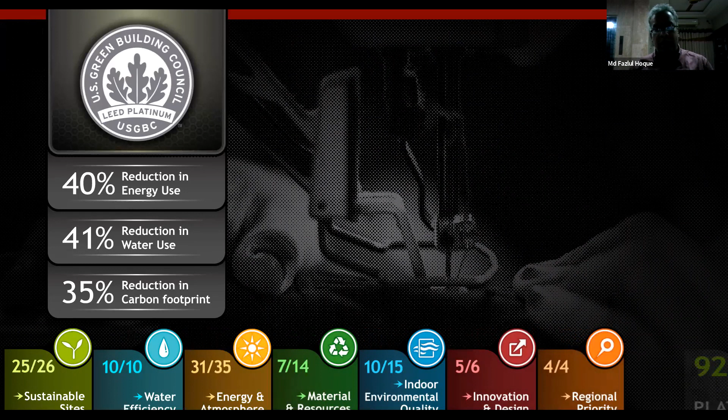Next slide, please. I will just share with you some features. This is the summary of the whole story: we scored 92, and there is the breakup of the numbers. Those who are very familiar with LEED can easily understand. But in summary, we are 40% efficient in energy use, we have 41% efficiency in water use, and 35% efficiency in terms of carbon emissions. Those are the three major pillars that we always focus on. But there are other facilities I will share in the next slides.

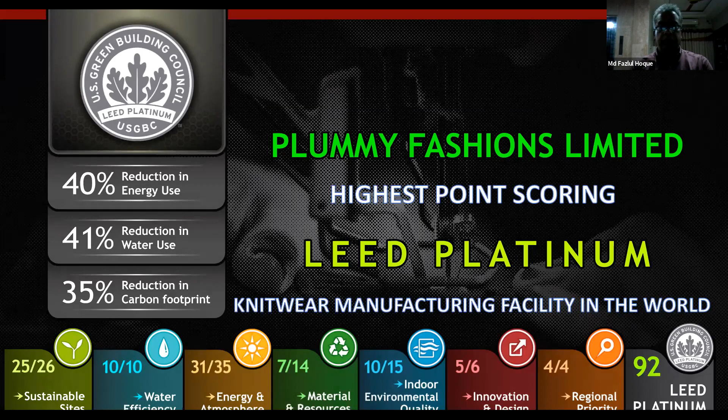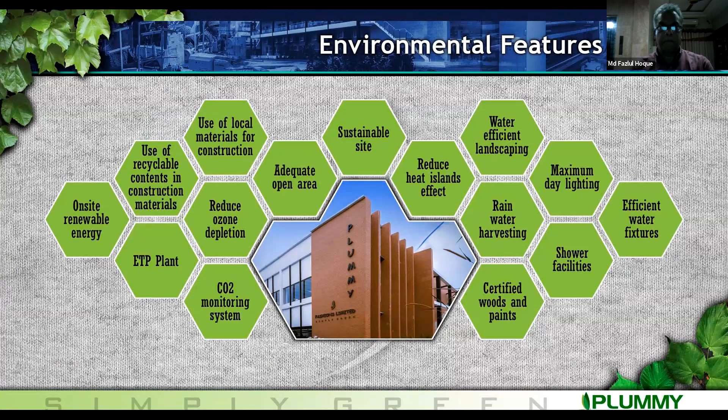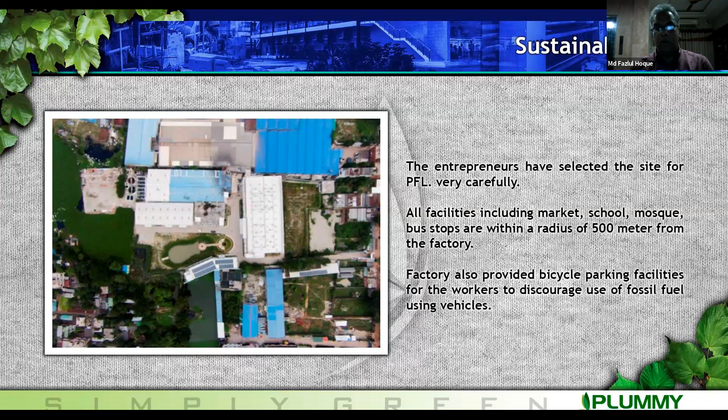This is a drone picture of Plummy Fashions, showing how strategically we are located as per the LEED requirement for what they call a sustainable location. Sustainable location means facilities like workers' housing, shopping, praying, and children's school should be within 500 meters, so that we can save a lot of energy in the transportation of workers. We are very strategically located, so we could achieve all these requirements from LEED.

As per the LEED Platinum requirement, not only do we have to score 80 points out of 110, but there are a few other requirements, and one of these is 50% open area. This is part of the whole scenario in our factory; you can see how beautiful it looks. It is my factory, so I always feel very happy to see it, but whoever visited, like Matthias, at least says wow. As I said in a small gathering yesterday, it looks like a resort, and today it's even better with more greenery. We have almost 65% open area, where 50% is required. These are a couple of pictures, but there are other open areas as well.

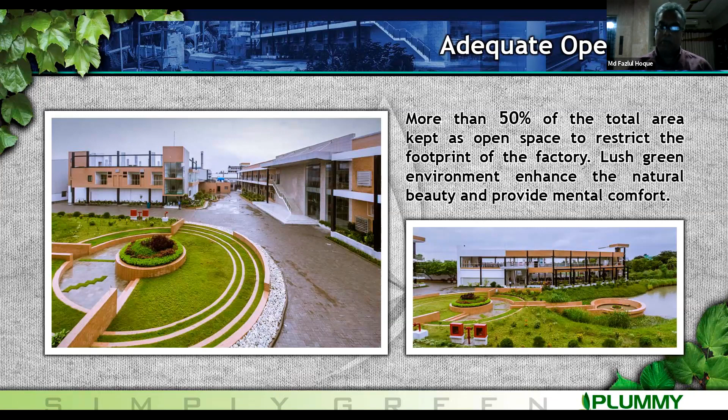As per the LEED requirement, we should have a water body inside to maintain natural tranquility, so we made this water body. It also helps us save rainwater, but it is not the only reservoir. There are 6 other underground reservoirs in different locations to preserve rainwater, which we use for toilet flushing. This reservoir is for natural tranquility and beauty, and also a huge source of water for firefighting. We have a dedicated firefighting reservoir, but additionally we calculated 6 million liters of water available in this water body. It is a multi-dimensional benefit.

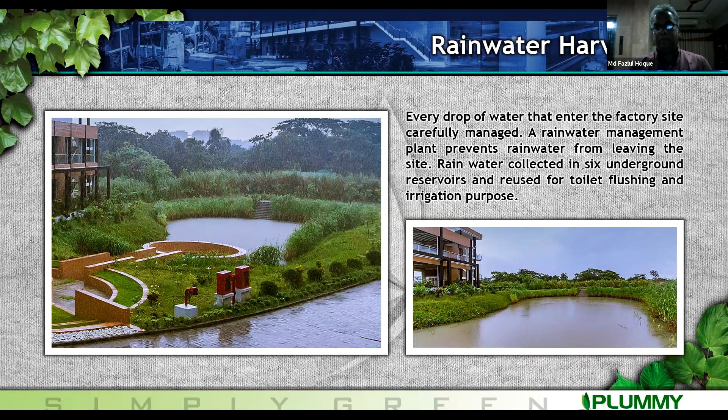And this is the air cooling system. We ensured that it is very comfortable.

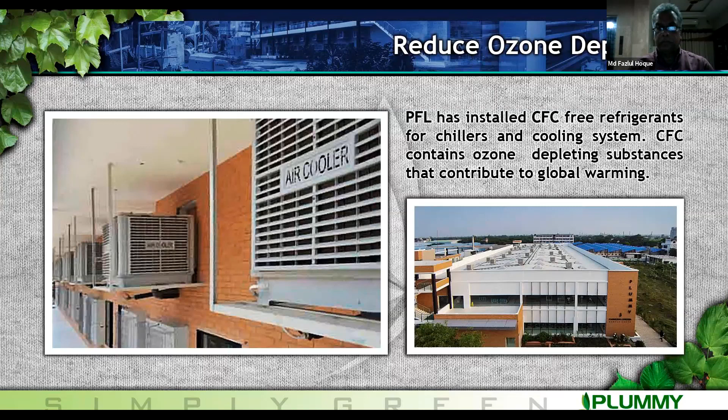Fazlul, are you still there? I can't hear him anymore. Maybe with this emergency lighting and the electricity struggling there in Bangladesh, it seems like we have lost him. Are you still there, Fazlul? Yeah, I'm here. Okay, good. Yeah. Cannot?

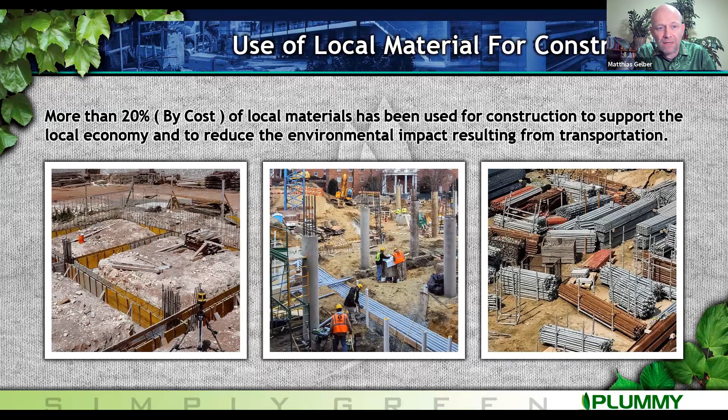I think his internet connection is a little bit unstable, but this is really the example showing the use of local materials as well. Partially, they used recycled materials. They tried to include local suppliers to increase the positive local impact on the local community. So this is the material sourcing part.

Then they installed as well a CO2 monitoring system. This is very important from a point of view of air quality, workers' health and safety. Do you have enough fresh air coming in? And particularly now in a time where we have COVID risk, this is even more critical.

Your level of CO2 in the occupied areas is actually an indication of whether you have got fresh air inside. If it's 800 parts per million going up to 1,000, then there is a lack of fresh air coming in. You can see here on the screen 518 parts per million, very high level of fresh air in there, because it's very close to 420, which would be about the ambient indication.

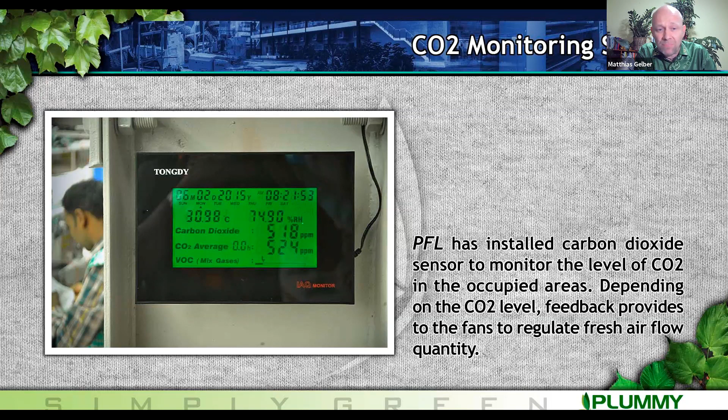This was actually fascinating when I was there. I was on the top floor where the workers were working without artificial light. You know, even in a garment factory where it comes down to the detail of doing a good, diligent job, the natural light that was coming through these skylights on the top floor was sufficient for the operational activities inside of the factory.

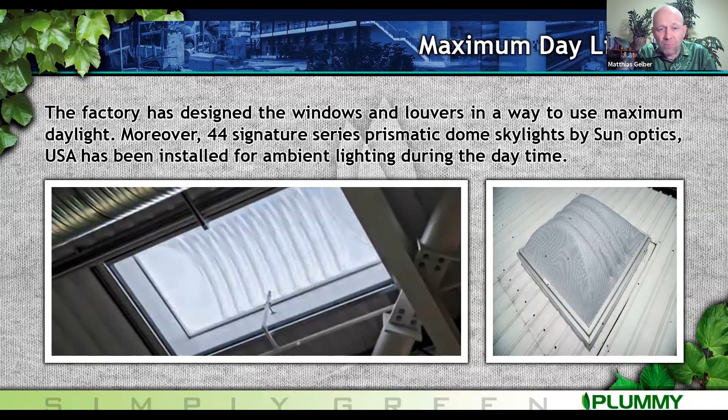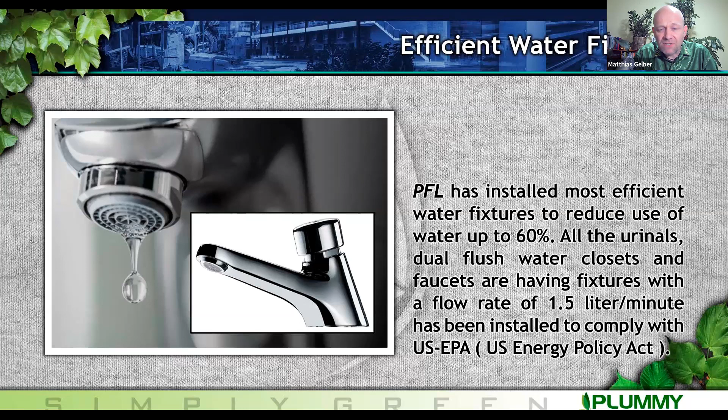And here we have the water fixtures, very efficient, 60% more efficient, urinals dual flush, big, small flush, and water fixtures having as well a low flow rate. You know, sometimes when you are in buildings, you put the water on and you can feel with the pressure of the water, there's a gigantic amount of water flowing through. But these are the ones that actually have a low flow rate to have water efficiency.

And certified woods were as well brought in, FSC certified, to make sure there is no cutting down of virgin forests, but sustainably managed forests that have been used. I think we will see a renaissance of wood as a building material because it absorbs carbon. So it is really a carbon sink. As long as it comes from sustainable sources or reused sources, it's actually very good because it locks the carbon in the long term. So this is as well very important for future construction. If we can have natural materials, natural biomass, I think that will be very good.

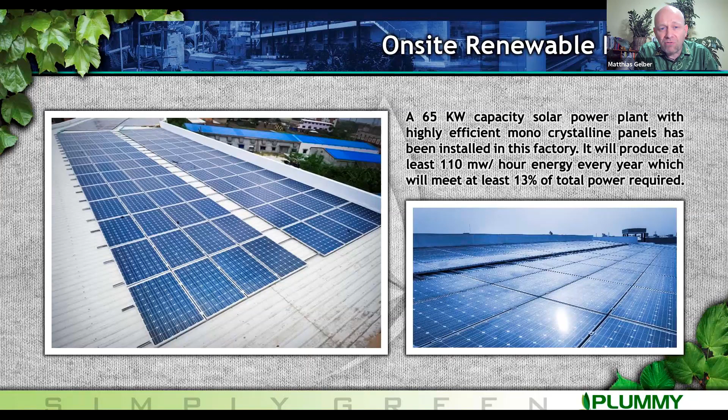And then one great feature as well is the 65 kilowatt capacity of solar that's been installed on the roof to power parts of the factory. It's about 13% of the total power required. I was as well very impressed when I was there in the canteen. The canteen is a totally open design, all fresh air, all natural lighting. You know, if there's any smell, it can immediately move out because it's a very open concept. So all of the design features were optimized from an environmental point of view.

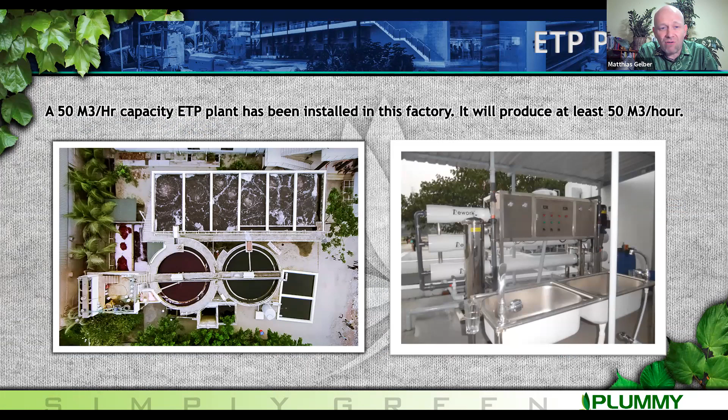And this was one of my favorites, because Fazlul asked me at the end of visiting his wastewater treatment plant, Matthias, why don't you take a sip of water? Would you do that? Normally, in any garment factory in Bangladesh, you would not dare to touch the water at the end of the effluent treatment plant. But here, it is cleaned up to such a level that it has drinking water quality. And if I remember correctly, Fazlul is as well using non-toxic dyes. So he has a lot of customers in Europe.

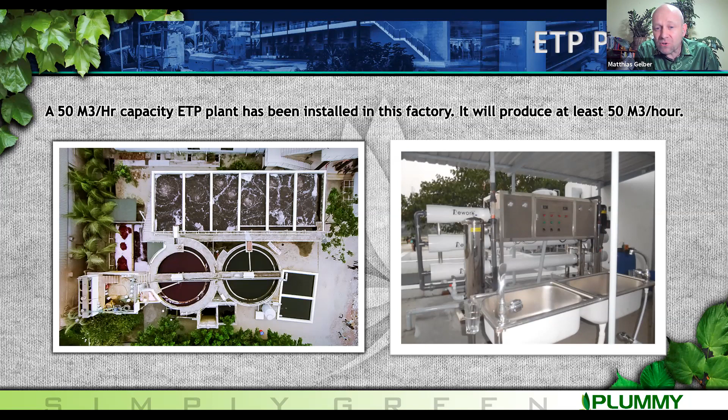He has some customers even that are using organic cotton, eco-friendly raw material, combine that with dyes that are more eco-friendly and an absolutely excellent wastewater treatment plant. And you have a great supplier that doesn't put a big famous European or North American brand at risk because everything they do is in place.

This is as well, I think, unique in some countries like Bangladesh, where really the female workers who would usually be expected to look after the kids can have their kids be in the child care center and they can earn a wage and they can have a career. I think this is an excellent example how it really should be. And then you get workers being very committed to your organization.

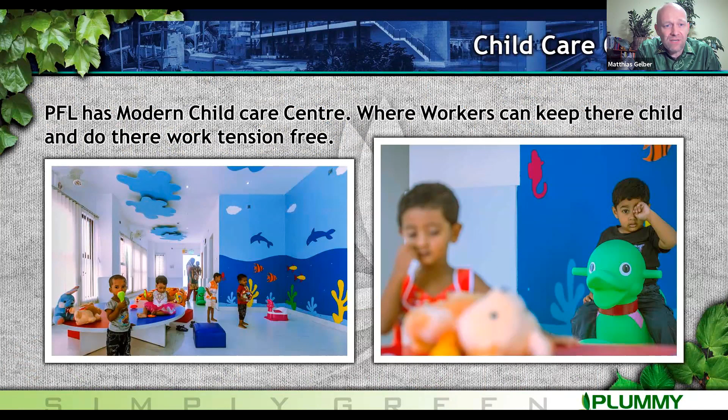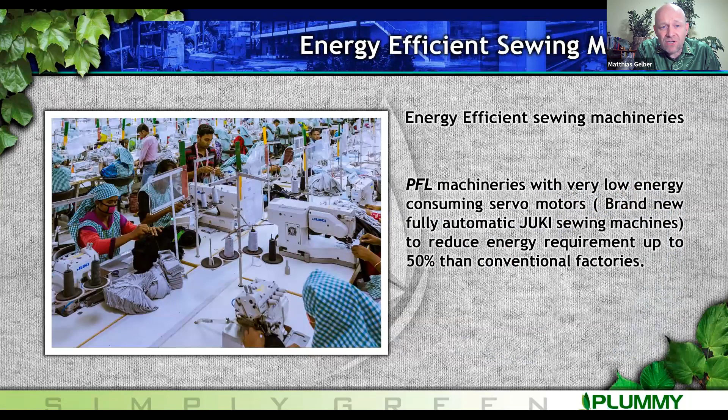And I'm sorry that you had the power challenges and the sound challenges, but I hope you're okay with me finishing the presentation on your behalf. But hopefully later on, when we have the Q&A section, you can contribute additional inputs, Fazlul. Thank you, Matthias. Thank you, Matthias, for supporting me. Anyway, carry on yourself. I'm sorry with this electricity problem. Yeah, no problem, no problem. I think we got through it very well.

I would now like to ask Myrrh Caplan, the Senior Sustainability Director at Skanska USA, to give us her innovative presentation of the case study, Kendeda Building for Innovative Sustainable Design. And I will stop sharing the slides here, and I will let Myrrh present hers. And I saw a glimpse of it yesterday. It will be a very interesting way of visiting a building virtually.

Yeah, so we're going to go. Can you hear me okay? Yes, excellent. Yep.

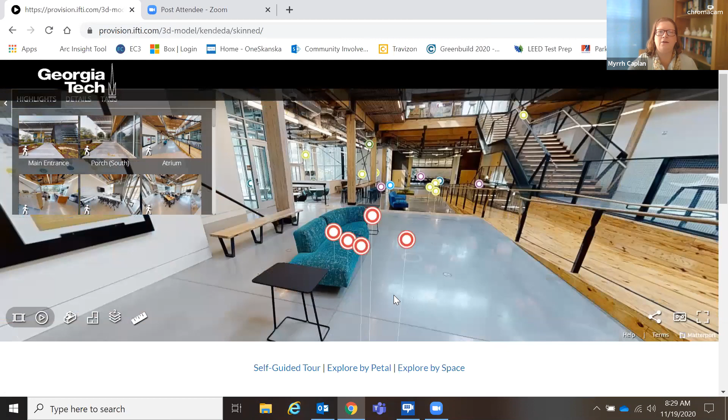So I'm just going to take you inside here, just so you can kind of see the interior a bit, and then we'll jump around topics. So this program is called Matterport. Typically, if you hear about this program being used, it is in existing facilities where a construction company like us is trying to get really, really finite details in terms of connection points or where existing utilities are, right?

So this application of it, by having it used in a building that's complete, and we're adding in pinpointed links to videos and to stories and to informational bits about, here's how you could do it yourself kind of thing. This is very much an educational building because it is on an educational campus, but also with the intent of furthering the story and furthering people's commitment to trying to go for net positive.

So since I'm clicked on one of the energy ones, I'll jump into some of the energy data. So this building will use 1/3 the energy of a typical building. It's got an EUI, energy use intensity, of 32, and it uses 900 plus solar panels on the roof to do much of that. But, as most of you know, the important thing about coming to net positive or even net zero is that you reduce as much as you can inside. You incorporate as many passive strategies as you can before you look to adding renewables to the building.